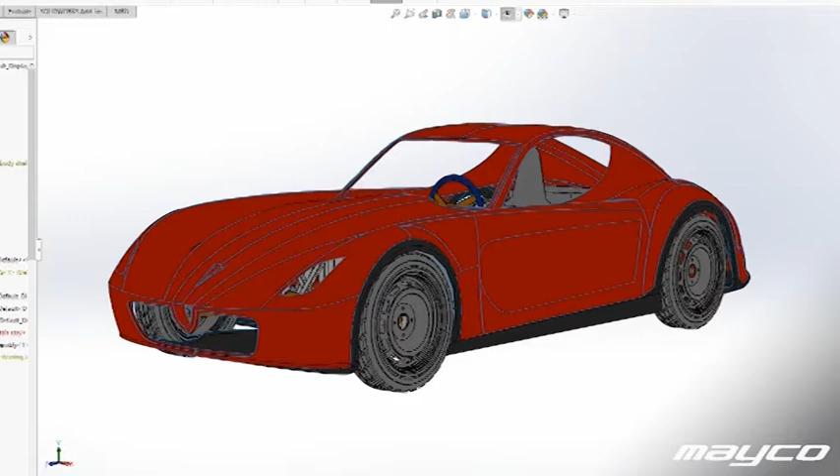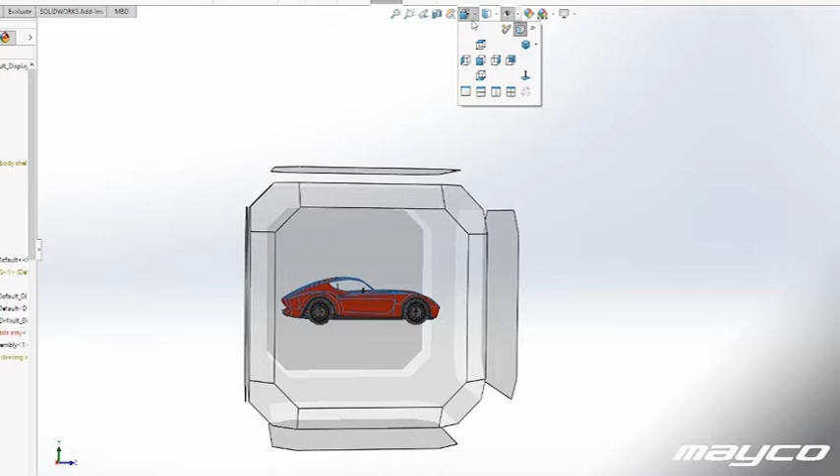The difficult thing when designing a car from scratch is making choices. Now, for designing a car and designing the right proportions, the tire is very important. Because the ratio between the size of the tire and the overall height of the vehicle, depending on what type of vehicle you want to build, that ratio is very important.

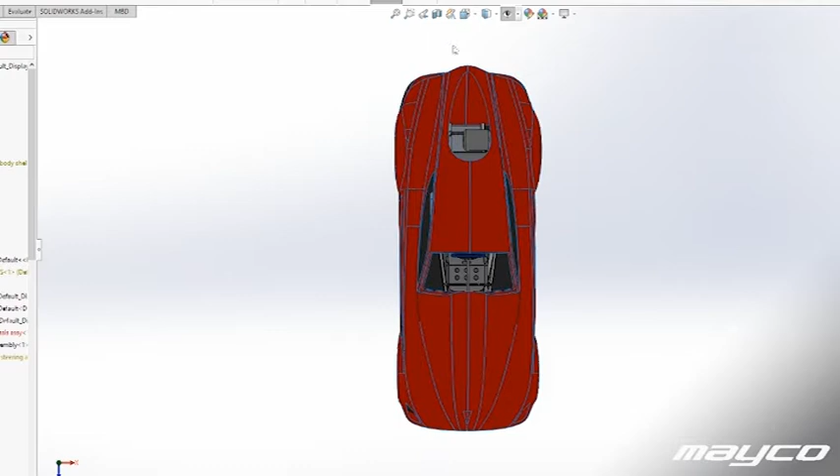Now, for my car I want to have sportive models with a sportive setup. That means that I want to have a ratio of maximum 1 to 2. So that means that the tire is half the height of the vehicle. So if the vehicle is 1.2 meter high, I want to have a tire of at least 600 millimeters. That would be perfect.

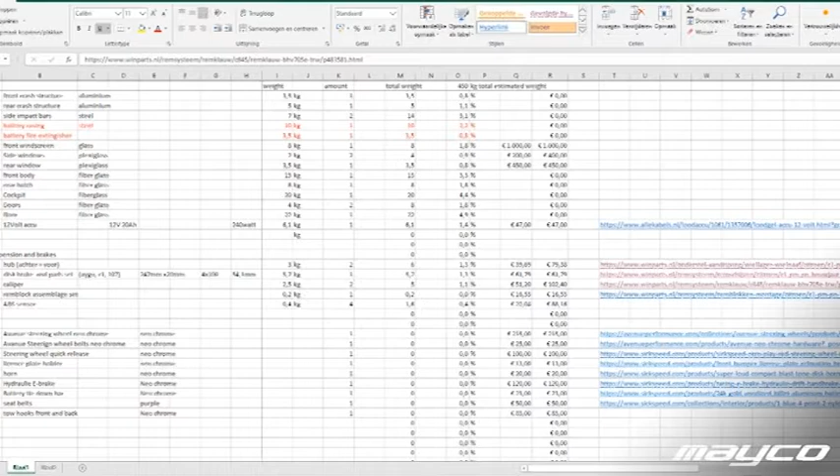With the new seating arrangement, I saw that I could go much lower than 1.2 meter because my target was 1.15 meters, so just below 1.2 meter high. And with the new seating arrangement, I could drop down to almost a meter high. That meant I could go back to the original tire that I selected. And the original tire has a diameter of 570 millimeters and is 135/70/15. This is a very narrow tire, which is good for the aerodynamics, and it has a decent size rim.

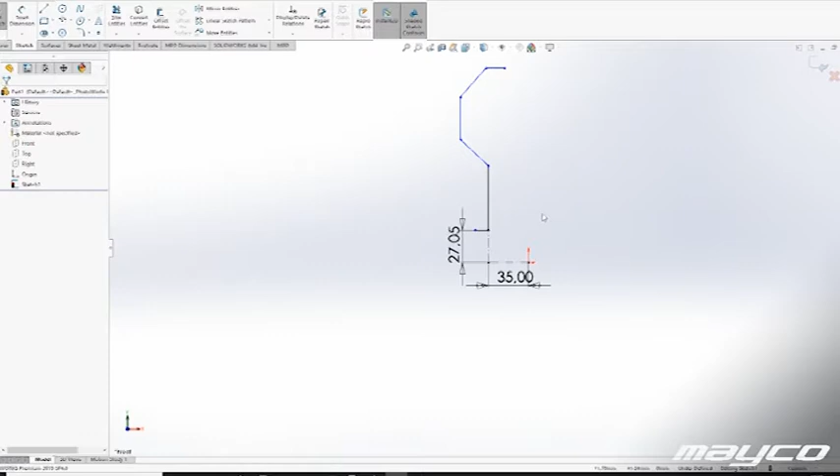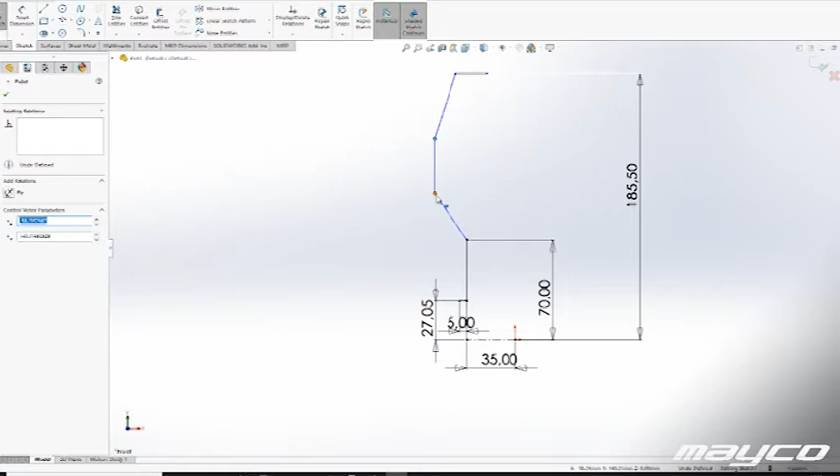Of course, it will be very difficult to have aftermarket rims, but I don't really care at this point in time. I need to have a cheap starting point. Looking at other rim sizes and wheel sizes and tire sizes, they all come back to that 570 diameter wheel. So I can run a 15 inch rim with a very narrow tire, or a 16 with a little bit wider tire, or a 17 with a little bit wider tire, or even an 18 inch wheel with a little bit wider tire.

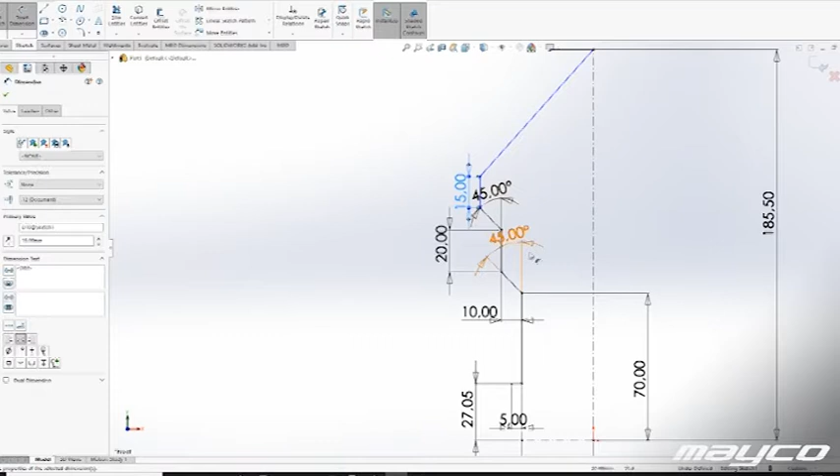Again, for me, this wheel combo allows me comfort, but also is cost effective. It's also heavier, but for me now at this point in time, cost is also a very important point. Something I mentioned a little bit ago in one of my previous movies regarding this. Saving weight is very important on an ultralight build, however, against what cost? And I mentioned back then that we had this Wilwood brake system that was at least 3 times lighter, but it was also at least 3 times more expensive.

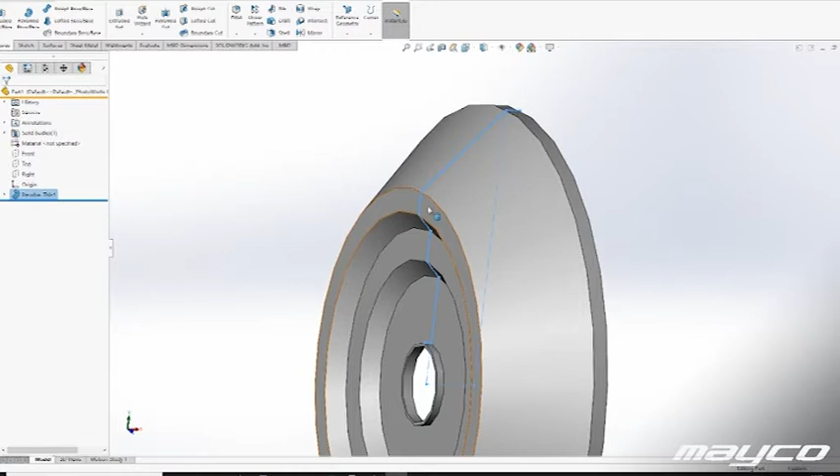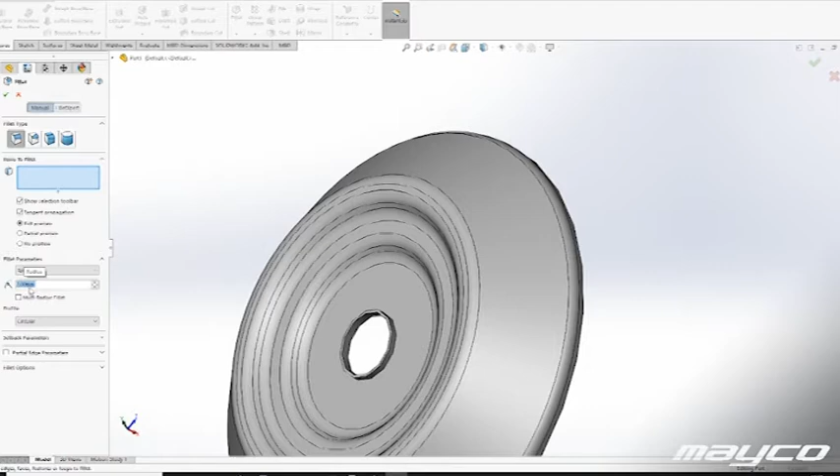And that's the thing that you often will find. The same with body panels. You can go for carbon fiber, or you can go for plastic or fiberglass. But yeah, the price difference is tremendous. So these are all choices that we need to make when we are doing this. And making choices is very difficult, especially when it comes to a battery pack, for example. Most people that make YouTube channels here and that make content, they will have a car and they will buy a part that they can bolt on. This project is not anywhere like that. You need to source between different models and between different brands to get what you want.

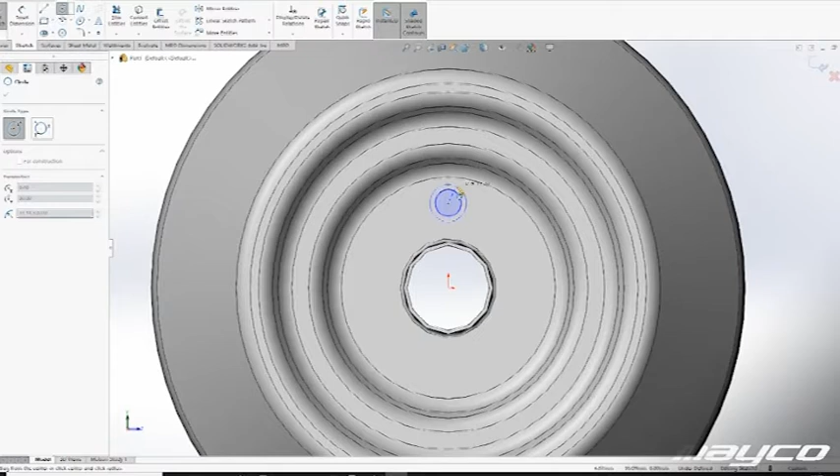For example, I found a caliper and a disc that I wanted to use. However, for that PCD, I couldn't find any rim in 15 inch that would support the tire. I would either go with a rim that was way too wide for the tire, or I had to switch to a wider tire altogether. Again, something I didn't want.

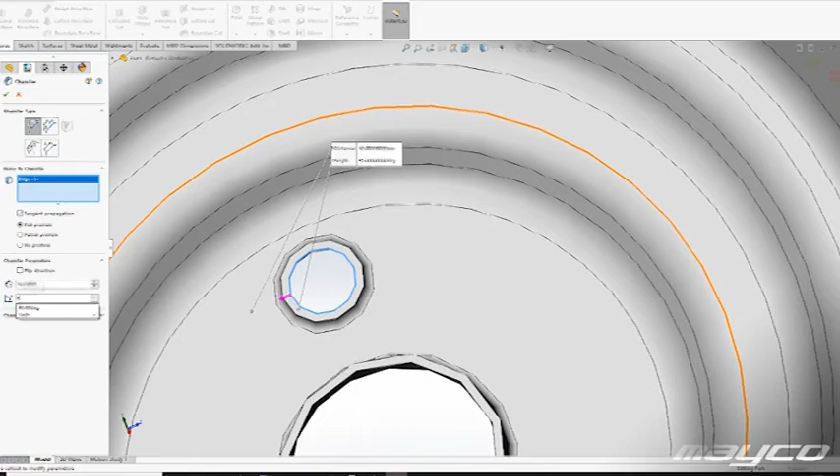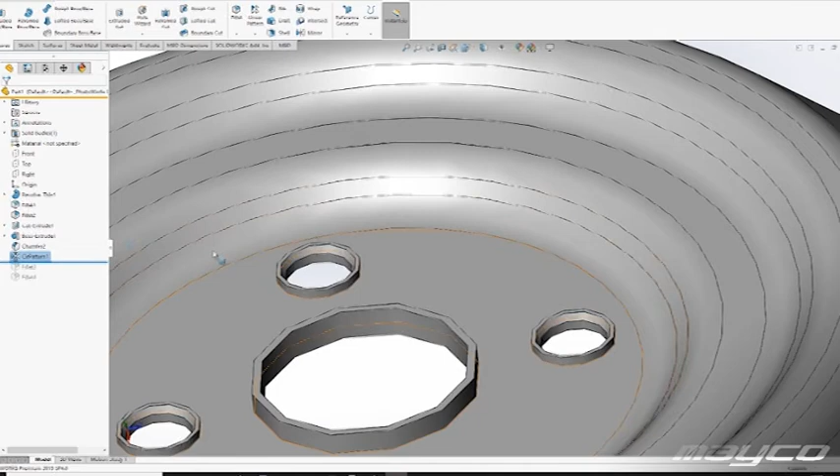So I went to look what other rims there were available, and then I found that Volkswagen, or at least the 4x100 PCD, is used for very narrow tires in 15 inch, 4.5 inch wide, 5 inch wide, 5.5 inch wide, 6 inch wide, 6.5 inch wide. It's all readily available. So then I decided to switch to 4x100 PCD. Then I had the tire, I had the rim, but now I had to find a new hub and a new disc brake and a new caliper, perhaps.

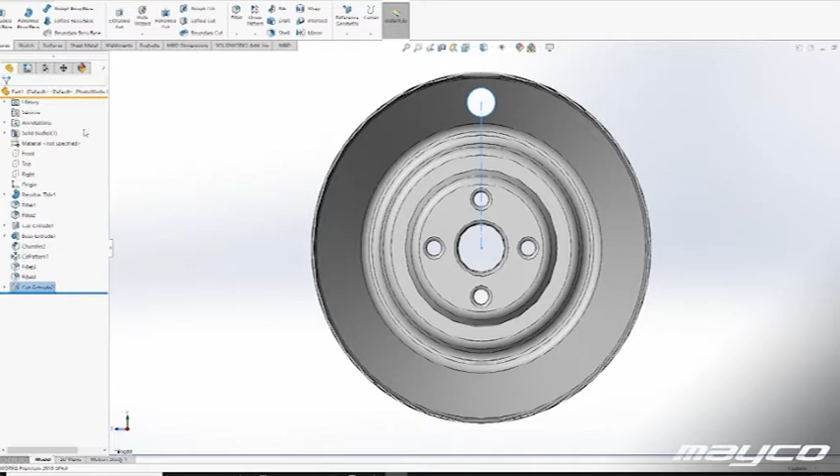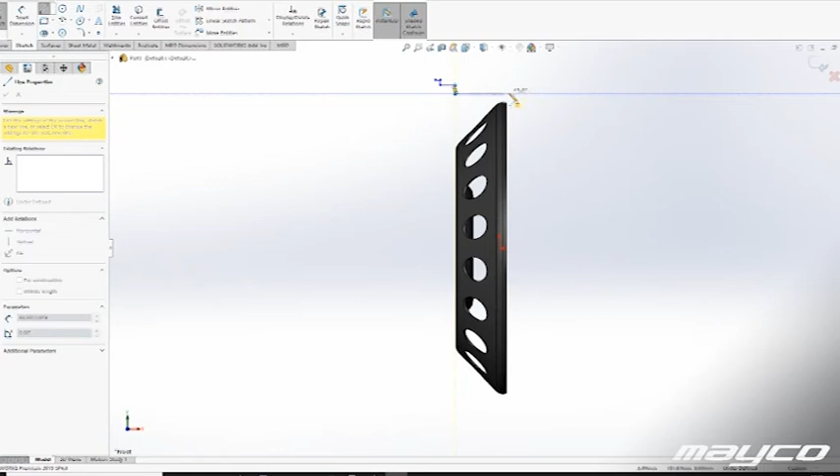Then I found from a readily available model a hub for the rear axle, which I could use for the front axle, because I have a rear wheel drive and most cars in Europe are front wheel drive. So the hub of the rear I could use in the front. So I was working on that, but then I didn't have a brake system, so I thought I'd use that brake system. But then you get into the modern day discs, which are 20 mil thick, and the disc that I had was 10 mil thick. So then you can maybe switch to a rear disc, but then the diameter is too small, and then you cannot find the front caliper with it.

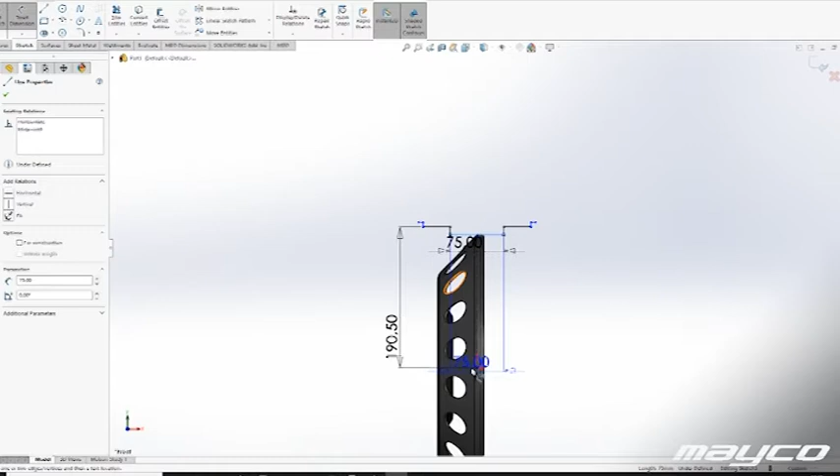So in the end, after a lot of going back and forth, I decided to stay with the brake caliper of the Peugeot that I had, and stay with the design of that caliper, and either re-drill it to 4x100 myself, or go for a 2-piece brake rotor. But then I found myself having a little bit of an issue.

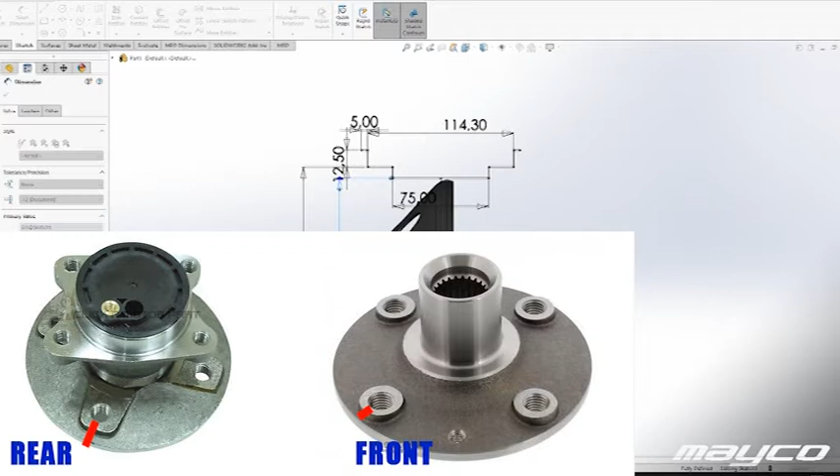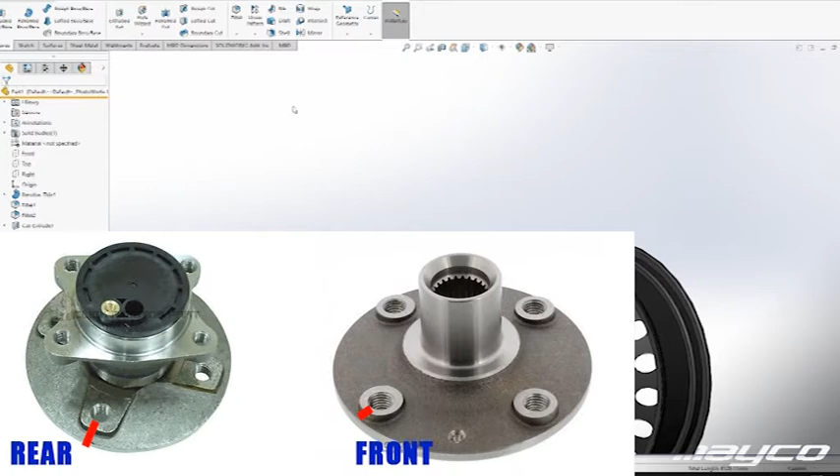The rear hub assembly that I really want to use has a very big flange. Normally on the front the flange is kept very small for the hub, and the bolts will just barely fit into the hub to mount the wheel onto, and then the disc for the disc brake system will barely slip over it, so it's a very tight fit. But now using a hub from the rear axle, which is much bigger, my front disc brake didn't fit anymore. So I had to look for a different disc brake, and that's how I came back to the Peugeot disc brake, because it's for a bigger PCD, so it was also a little bit bigger in itself.

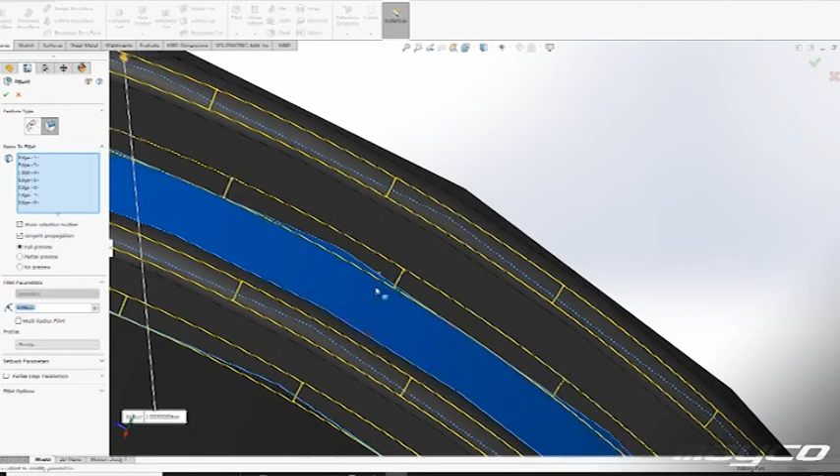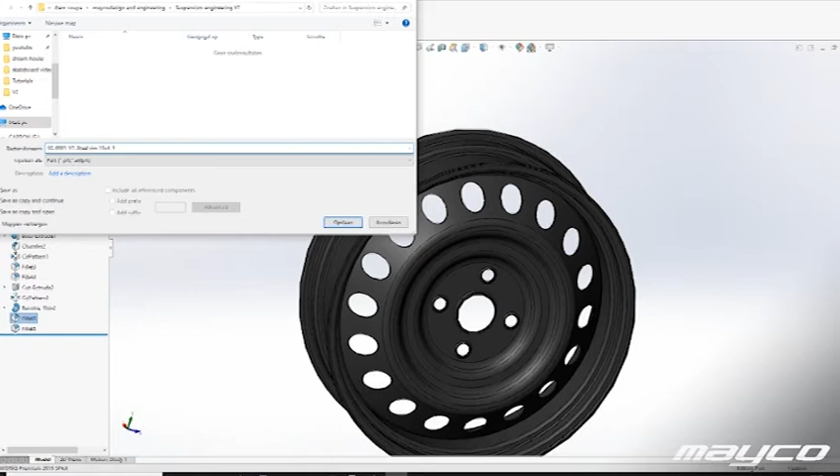However, if I'm going to customize something, I can better design it from scratch myself. So what I ended up with, after a lot of going back and forth, is using the tire that I knew, using a 4x100 4.5 inch wide 15 inch wheel, then go for the hub that I found, which is a full assembled part with the option to run ABS, and yeah, designing my own disc brake, designing my own hub carrier, and of course my own suspension, etc.

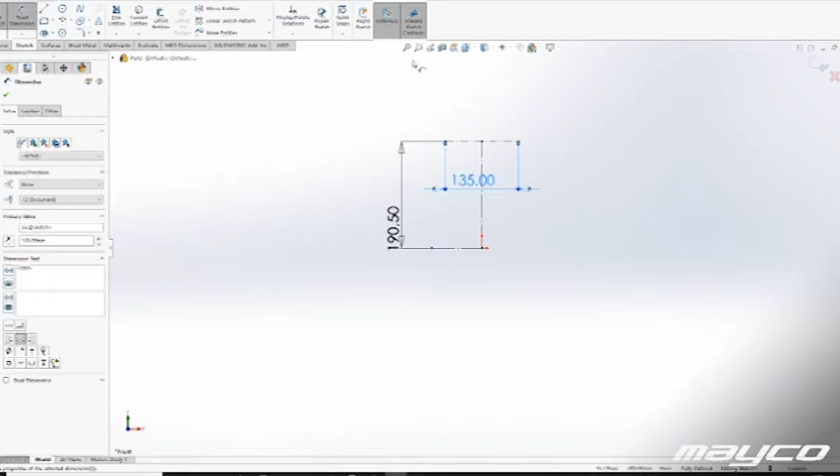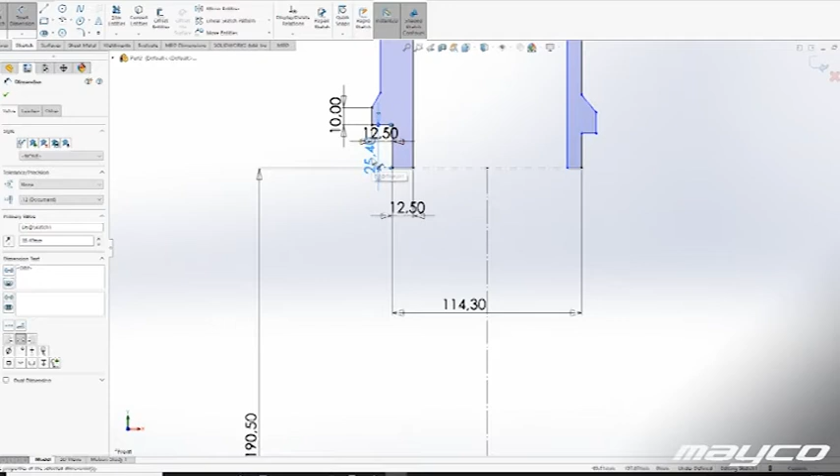So you start with one thing and then everything changes again, and that's what makes this extremely difficult. And it's extremely difficult to focus and to find something and to stick with it and to say, okay, this is final. But I think at this point in time I've made a lot of things which are the basic foundation for this project. I have finalized them, I think, quite well, and now we can really start to redesign everything and start developing the chassis more, etc.

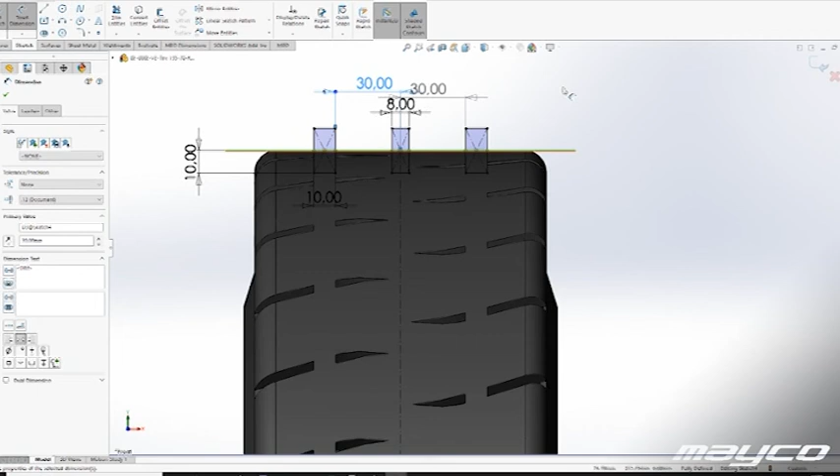So I hope this creates some understanding for what I'm doing and why it's difficult and why it's taken a long time. And yeah, I hope that you enjoy the content of today.

Ain't seen nothing yet.